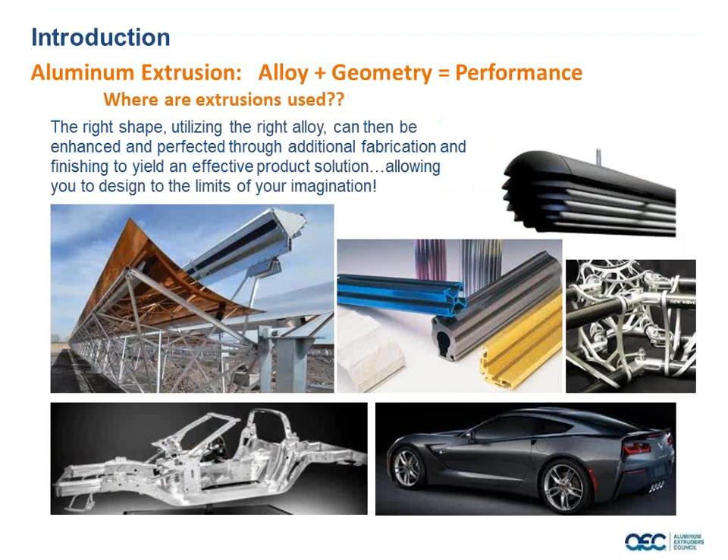The first couple of slides you're seeing here are really just showing some examples of applications for extrusions. They go into a wide variety of industries, and you'll probably see them around you every day once you start looking for them.

What I'd like to move on to is our agenda for today. I'll spend a few minutes briefly going over the advantages of aluminum and the advantages of the aluminum extrusion process as a means of forming aluminum. Todd will go specifically over the details of what constitutes a good design and what makes a design a potential winner in our annual design competition. Then we'll go through the actual details of what's involved in submitting a design to the competition, what it is, and that sort of thing. Nancy will conclude by telling you how to access several additional resources that can help you as you're preparing your design for the competition.

As mentioned earlier, one of the things we're trying to do more of is actually visit schools and institutions to share even more about our industry. We try to structure our presentations to the specific class, whether engineering classes, design classes, or any class looking for more information on the extrusion process. We'll structure a class that meets the requirements of the class, bring samples, and do our best to make it as interactive as possible so you can learn even more about our industry, in addition to designing and using actual extrusion products.

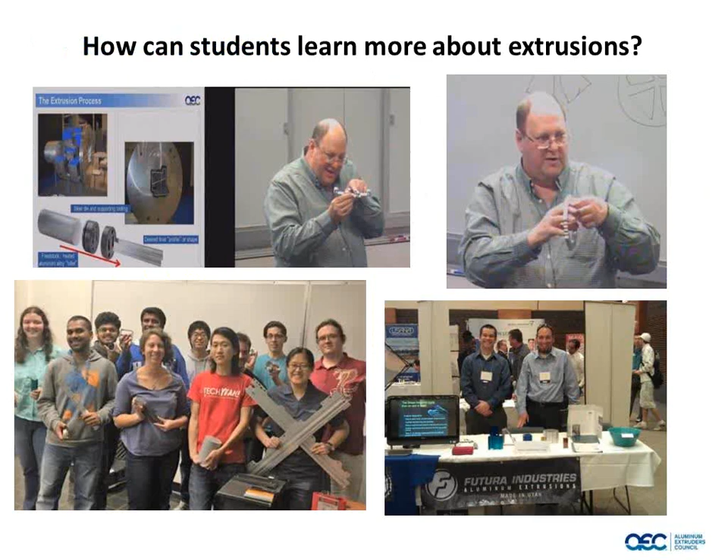As a starting point, just a few brief bullets on the advantages of using aluminum as a material, and then the advantages of using the aluminum extrusion process to form that material.

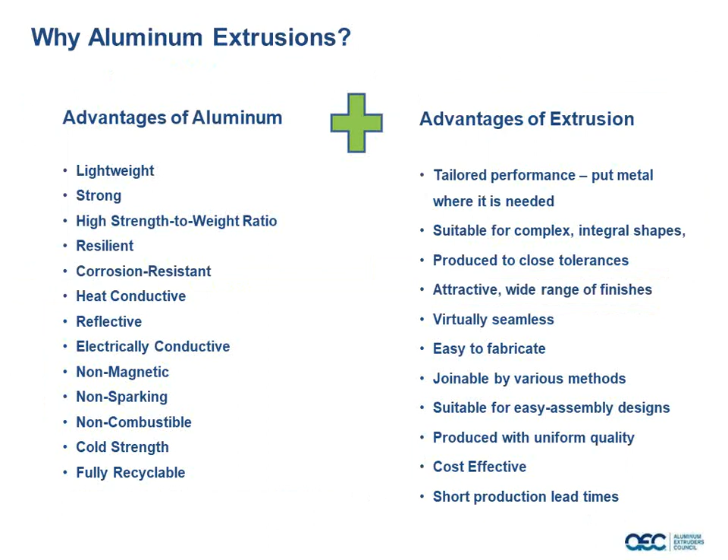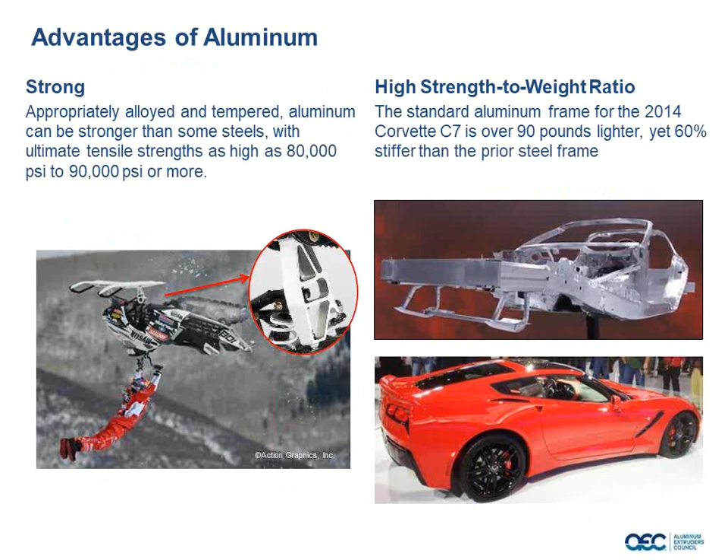Some of the most common recognized characteristics of aluminum are that it is lightweight and strong and has a high strength to weight ratio. It's also a very good conductor of heat and electricity. As you'll see in applications like space frames for automobiles and structural components in a snowmobile, its strength to weight ratio makes it a great material. Interestingly, one of the other wonderful characteristics of aluminum is it gets stronger as it gets colder, so it has wonderful characteristics especially in cold weather.

One of the other real benefits of aluminum is its recyclability. Most of you are aware that aluminum is highly recyclable, but you may not be aware of the money-saving characteristics of recycling aluminum. To remelt and reuse aluminum requires only 8% of the energy required to produce virgin aluminum. That's one of the reasons aluminum has been widely recycled for years and will continue to be so.

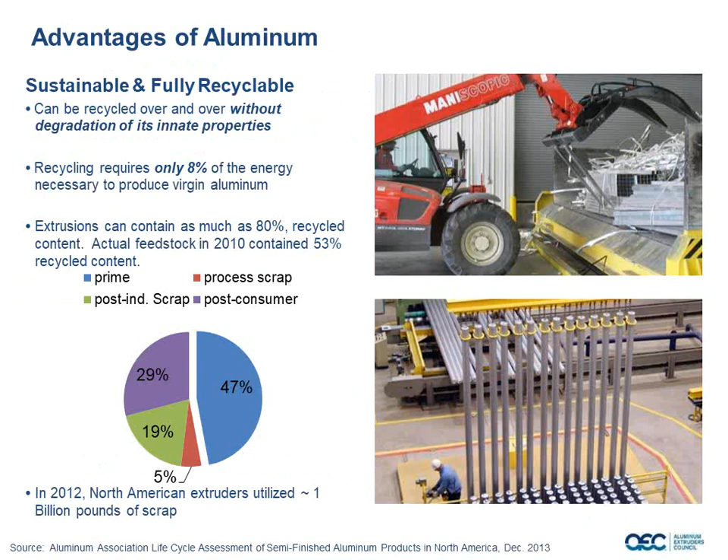Within the extrusion industry itself, typically more than 50% of the aluminum used is recycled in some form or fashion, although much of it is turnaround scrap generated within the facility, but much is also purchased from outside sources as scrap aluminum.

So a little bit more about the actual process. Again, it is not a mystery process. Everyone has in some way been involved with the extrusion process. It really is just taking a malleable product in one shape and forcing it through a die into another shape. The Play-Doh Fun Factory, if you look at the box, actually says it's an extruder toy. Another typical example is a tube of toothpaste, where you're taking something in a somewhat malleable state and forcing it through an opening into another shape.

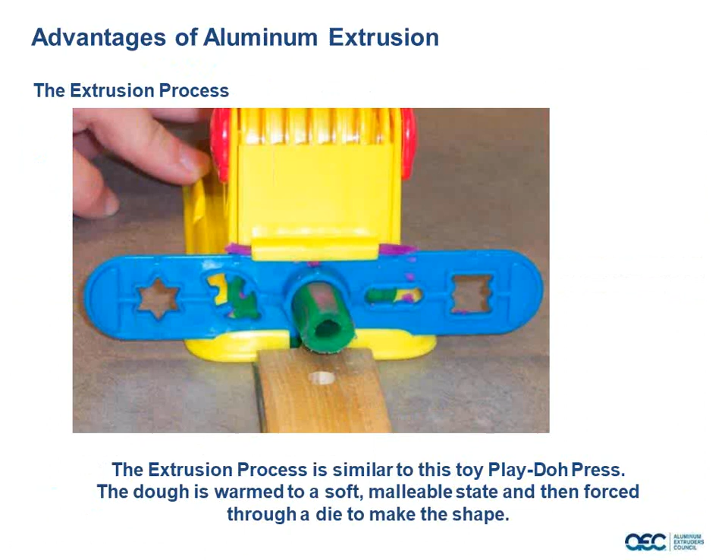That's exactly what we do in the aluminum extrusion process. We're just using aluminum instead of some of these softer materials. And the aluminum is still in a solid state - it is not molten when it's extruded.

This picture is a high-level overview of an actual extrusion process. You can see graphically at the top the sequence from start to finish, and the actual picture shows 3 strands of aluminum that have been extruded and are running down a runout table. The extrusion process typically produces lengths around 150 feet long, and then they're cut back to sizes usable by the purchaser of the product.

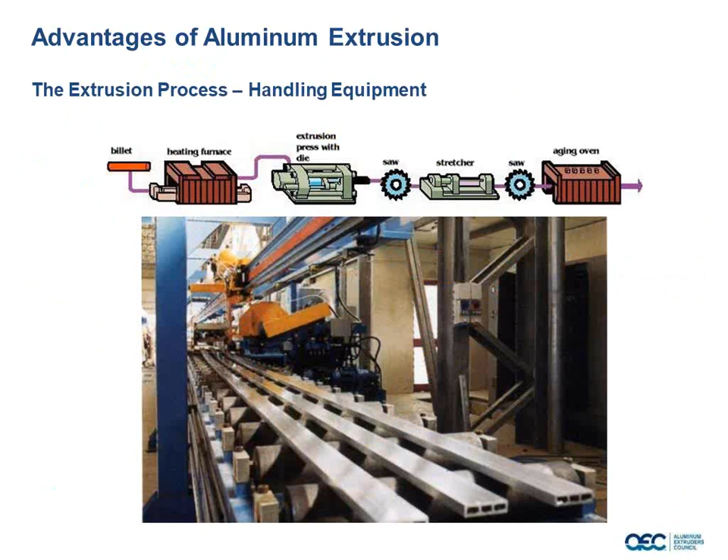With that, I'm going to turn the presentation over to Todd, who will go into more detail on what constitutes a good designed extrusion. Thank you.

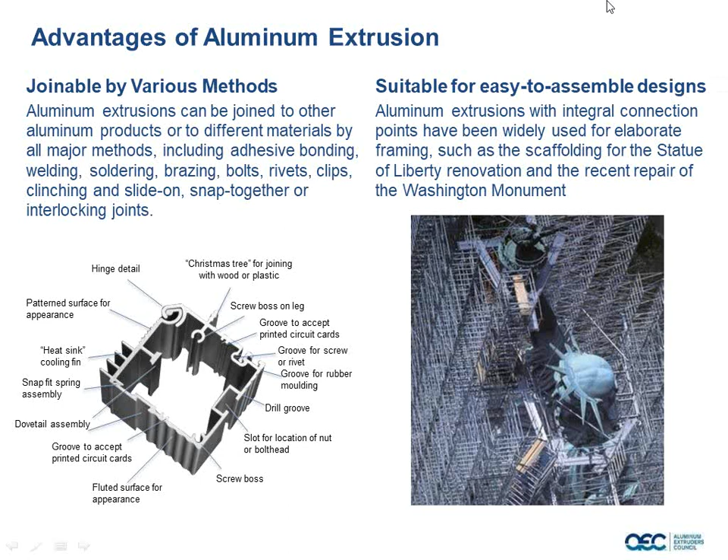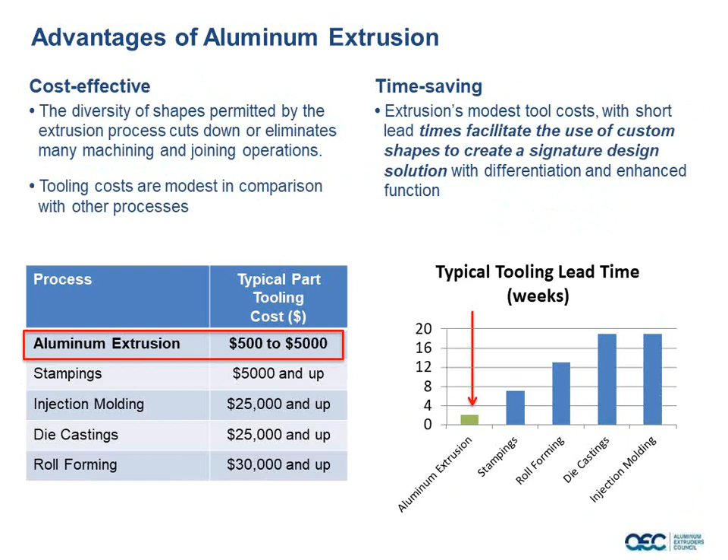Hi guys, thank you David for that great overview of what's going on with the industry as a whole. This slide talks about tooling - that's a consideration, and the low cost operation of tooling. Maybe for $500 to $5,000 you can buy a die and have an actual part in your hands, being able to go into production with something you're wanting to machine, anodize, or paint.

So when we look at that, we're thinking about, from a student or instructor's view, someone has an idea that they want to put into the design competition for consideration. Over the years, we've had a really wide breadth of entries. One of the things we always think about is there's an idea for a product, but can it be made? Can it be extruded? Is it cost effective? And is there really a market for that product? I think those are some of the considerations.

These are some of the limitations to the process - sometimes the entries we see are physically too large or too heavy and not capable of even being an aluminum extrusion.

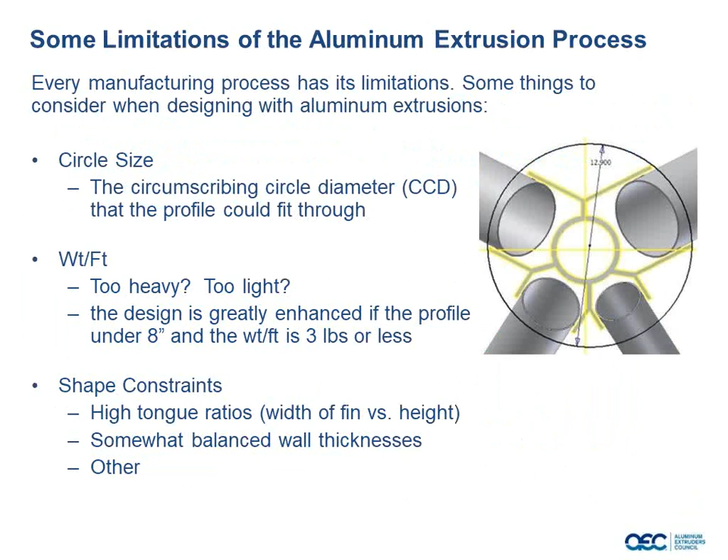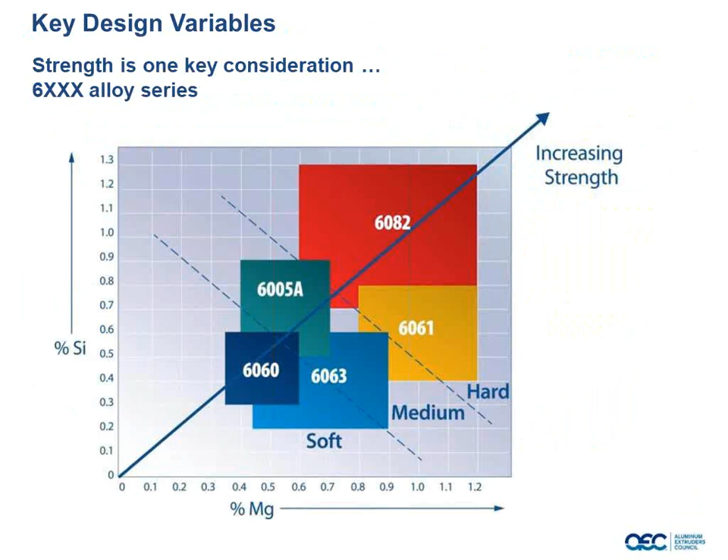So the other thing to think about is, what is the alloy? What's the strength requirements of the end-use product? This chart shows a very common set of alloys that are very good general purpose - 6063, 6005, 6060 - those are really good application alloys for the bulk of products where you have structural requirements, body in white applications, structural bridge type applications. The 6082, 6061 is clearly an option.

Can the profile that you're thinking about on your project be extrudable? I think that's really key. We're looking for balanced walls. They don't have to be the same thickness, but something that's reasonable.

Here's a slide that gives you some really good ideas. You'll get a link to this presentation, and I'd encourage you to go back through and look at some of the design ideas - hey, don't do this, do this instead. Smoothing the transitions and trying to also reduce the cost of the part you're considering.

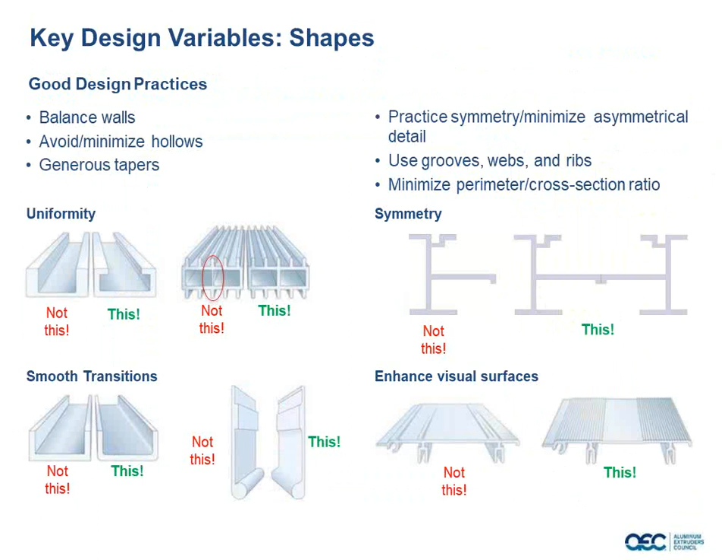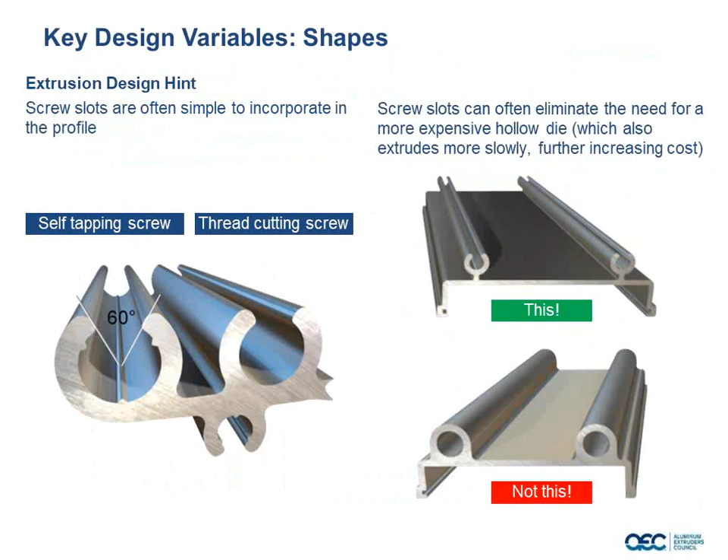Many times we see customers thinking that they need to drill and tap the holes. Here's a great opportunity for self-tapping screws to be used, where you can eliminate the entire machining process, hence the cost as well as the time to market to get that tooled up.

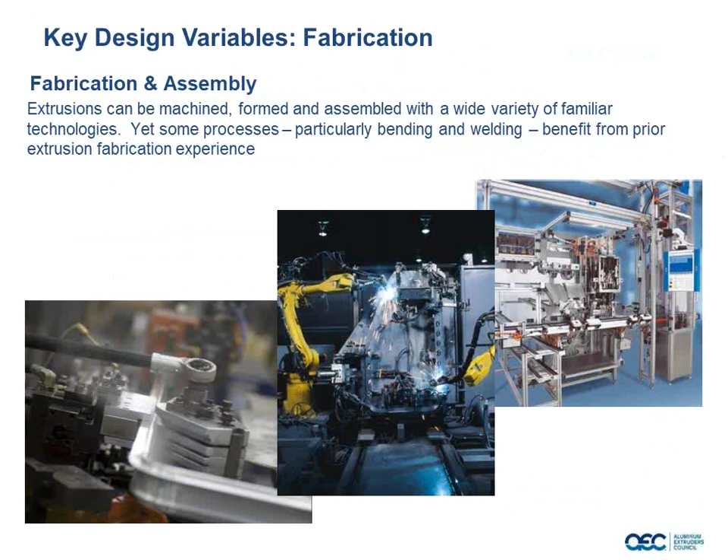So considerations for - you got this extrusion, you got the right alloy, you find it's extrudable, but what can I do with it? That's, I think, the value of the aluminum extrusion - you can do a lot with it. It's the shape, but then you can cut it, machine it, punch it, drill it, assemble it, paint it, anodize it, and your creativity can really take a run with this.

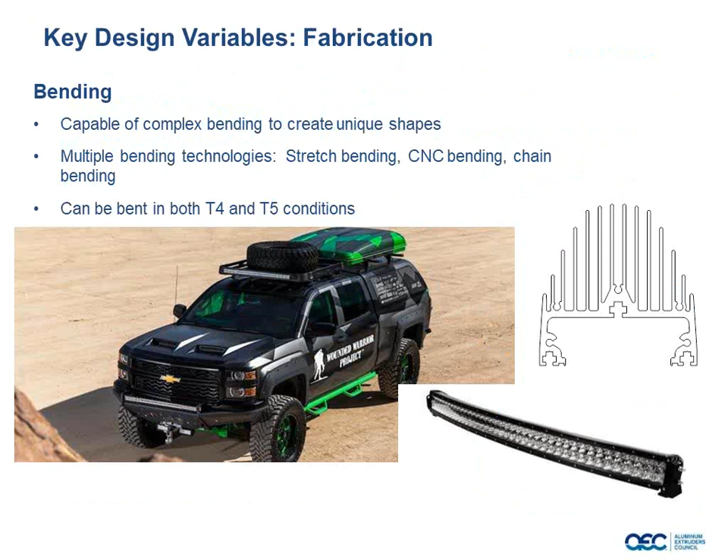So a great application for bending concepts. I'd encourage you to think it doesn't have to be a straight part. It can be formed in many different planes, and there are great processes to do that.

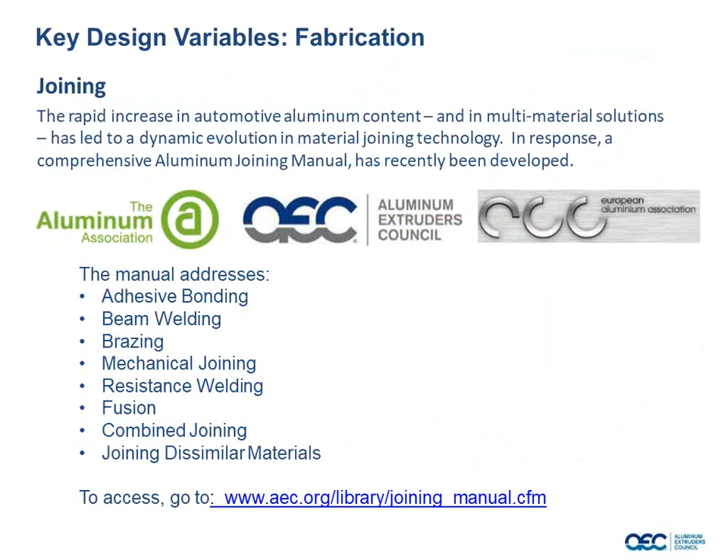Also joining - there's just been a lot of innovation in the joining area: adhesive bonding, friction stir welding applications, typical mechanical joining where you're joining it with fasteners. I'd encourage you to think not just about an extrusion, but how can you join other things to it, or extrusions one to the other, making your end product.

Another consideration - you got the extrusion, the idea, it's extrudable, you've got some cutting, machining, tapping, maybe bent the parts. Now what do you do with the finish? Is it just going to be mill finish, or would you like it cosmetic, or do you need some special end finish that meets your end use application? Maybe it's not cosmetic at all, but you need an anodized finish to protect it from corrosion. So here are some things to consider specific to the finishing of your aluminum extrusion design entry.

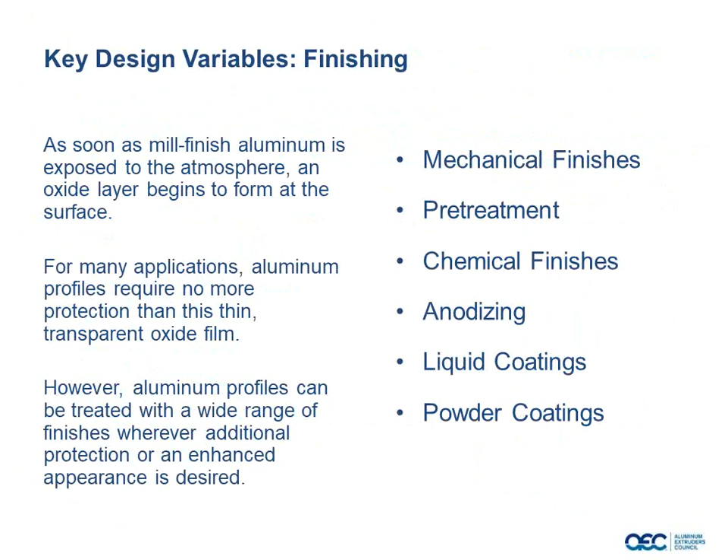Anodizing is a great solution. It's eco-friendly. It's not a plating, not something that's going to chip off - it's an integral part of the actual aluminum surface. You can get multiple colors, sizzly colors as I call them, or just the standard clear satin anodize for your parts.

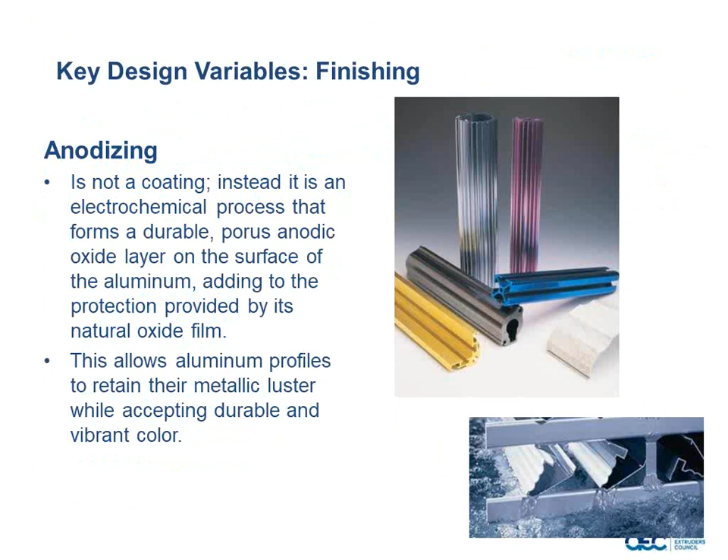Also solar energy - a huge consumer of aluminum, brackets and structural support for that. If you're thinking of a solar project, there's a lot of information out there on solar extrusion applications that you can tap into as a resource and be creative and innovative in your design entry.

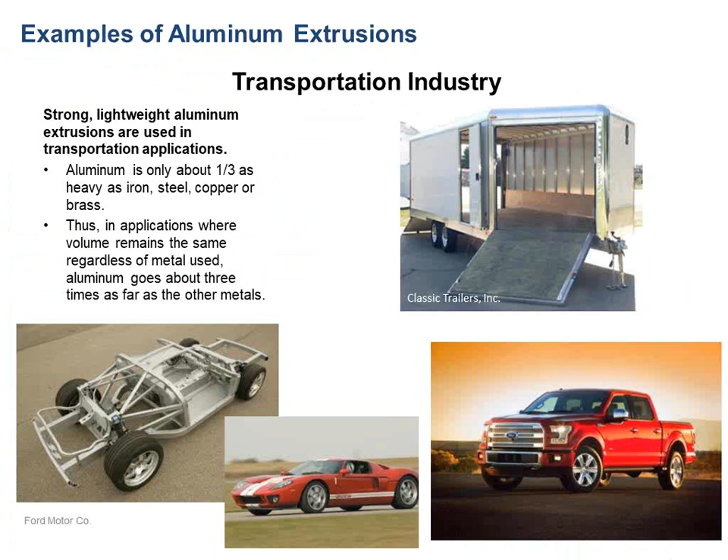The transportation industry - we talked earlier about the Corvette and the subframe, the body in white applications, but also the strength of aluminum versus steel, copper, high-strength steels, etc. It's a great opportunity for taking weight out, bringing structural integrity to the vehicle, toughness, robustness, and here are some applications where it's being used.

Another example: sunroof applications. Many vehicles are going to SUV and crossover applications with large panoramic sunroofs, and in each one there are aluminum extrusions that are highly fabricated, formed, and anodized. Great opportunities to check it out when you look at your car, your father's car, or your mother's car - there's a great application there for you to get some ideas on.

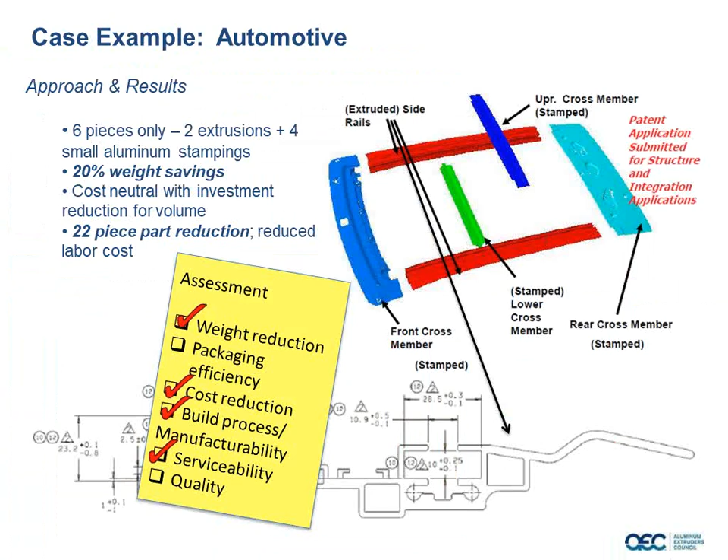Also in the medical area, if you ever have an MRI, you're laying on that transfer table going in and out. The table you're riding on is typically supported by aluminum extrusions, as is much of the cylindrical portion of the MRI itself. So extrusions are used in many different applications, and I'd encourage you to be creative and think outside the box, but then come back to the reality—is it something that can be made?

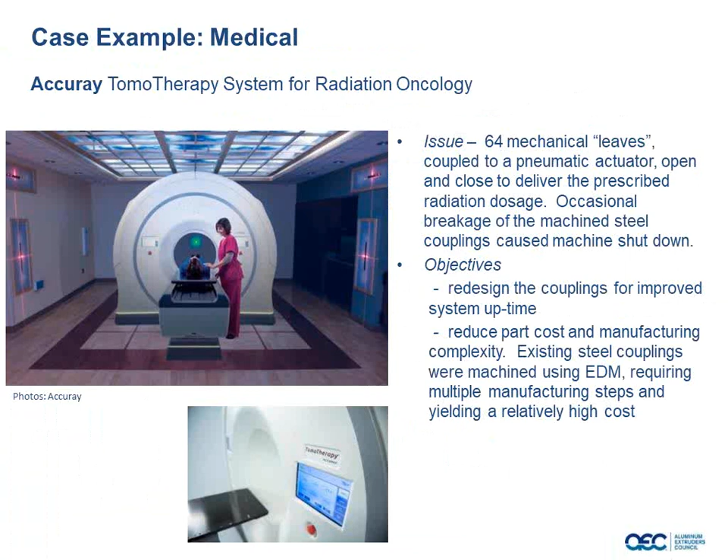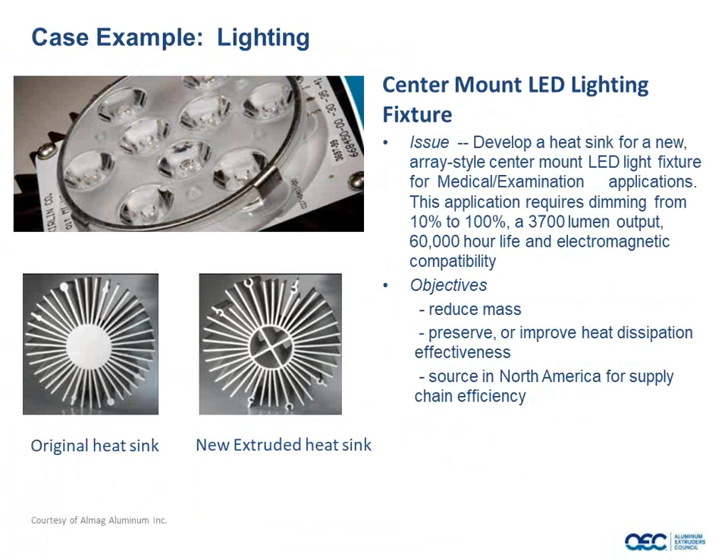LED lighting is a huge consumer of aluminum extrusions. You can use these for troffers, exterior lights, parking garage lights. In this application, the original heatsink on the far left had a large mass of aluminum, but the new design has 4 voids in the middle. This reduces the mass, increases thermal dissipation, reduces cost, and makes the extrusion more extrudable.

So real quickly, we gave you some ideas on things to consider. Again, what's the product you'd like to do? Is it cost effective? Is there a market for it? Is it extrudable? Have you considered some of the cost and design considerations? What type of fabrication, bending, welding, or forming is required? And then finish—could it be a mill finish, a painted product, or an anodized product? We're trying to give you some ideas, and we really appreciate the entries and the increase in creativity and innovation we've seen over the years.

And so with that, I'm going to turn it over about some ways that we can work together. You'll get more information on the design competition and how to find support resources as well.

All right, thank you, Todd. I'm going to spend a few more minutes going over some of the things that we as an industry would like to do to support schools and students, and then some more details specifically on the design competition.

So again, what can we do for you, the school? We can provide learning materials and learning opportunities. We can come into the classroom and do presentations structured to the specifics of the class itself. We can work with you on sponsoring design projects if that's a requirement of a senior class. We offer internship programs and are always looking for permanent employment opportunities for students, particularly in engineering. We're ready to come in and provide instruction on a process that typically isn't widely known or understood in the academic environment. We can also do plant tours if you're near some of our facilities.